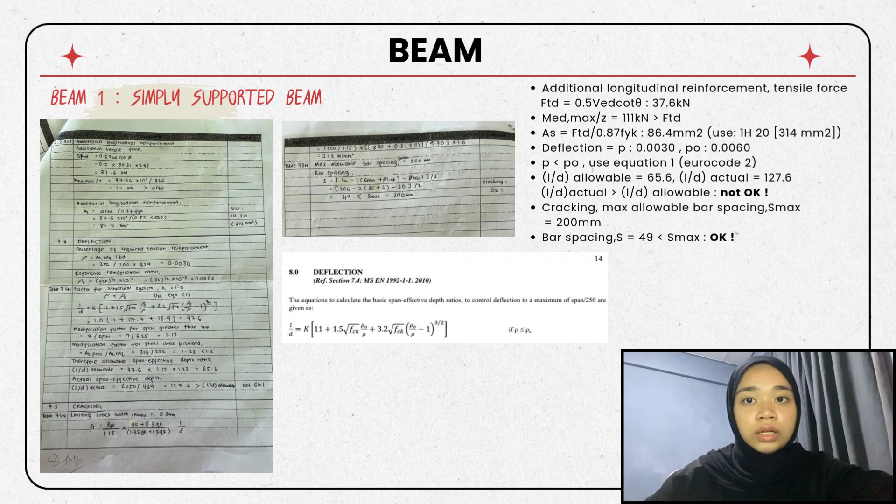My name is Elton Garcelaban Singh, card matrix 07 DKA5C, and now I am going to explain the beam 3 calculation.

So for beam number 3, this document details the initial structural design specifications for a continuous reinforced concrete T-beam, outlining a 4,300 mm span, 225 mm times 500 mm beam width, 110 mm slab thickness, 35 Newton per millimeter square concrete strength, 500 Newton per millimeter square steel strength, and this calculates the critical 1345 mm to 1845 mm effective flange width, and establishes the permanent load GK, which is 5.35 kilonewton per meter square, and the variable load QK is 3.00 kilonewton per meter square.

So for this part, the load calculation converts the total slab load into a line load that the beam has to carry, where the total permanent load is 6.38 kilonewton per meter. The total variable load is 9.00 kilonewton per meter. These are factored up to get the ultimate design load, which is used for safety checks. This load creates a maximum bending moment in the middle of the span AB to CD equal to 154 kilonewton meter.

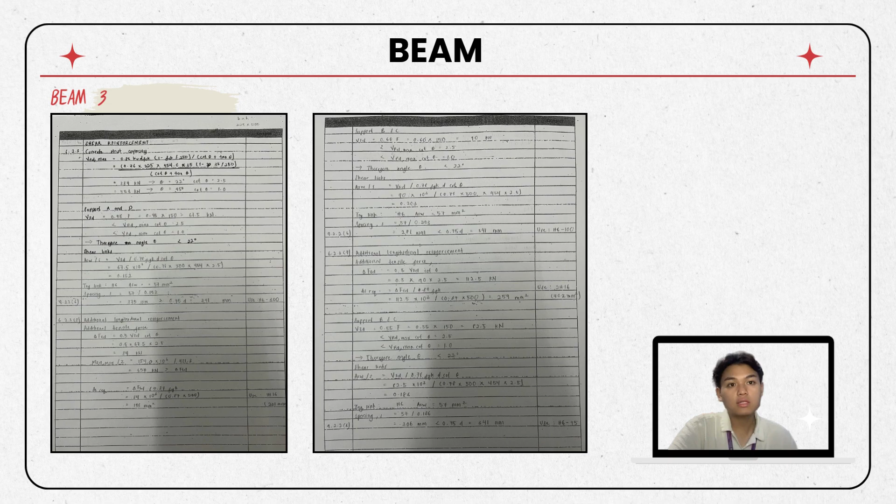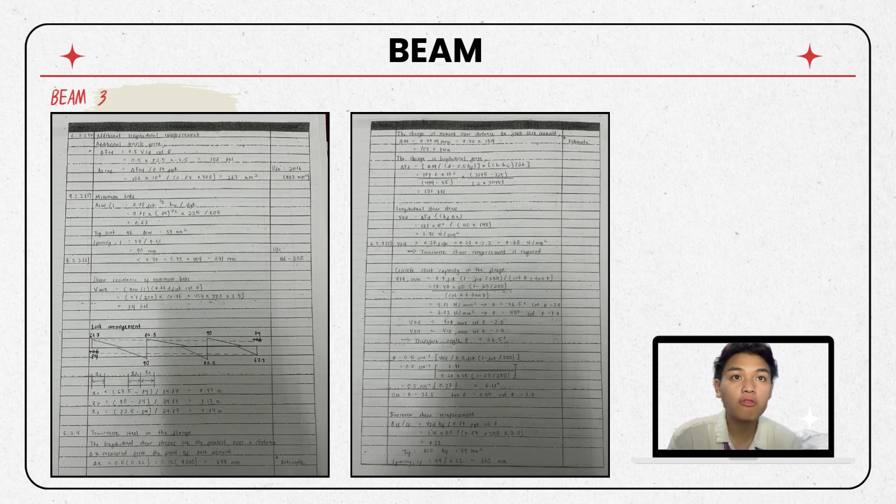So for this part, in summary, the beam needs minimum links where the shear is low, extra main steel to resist shear effects, and H10 at 260 mm links running across the slab to prevent the slab from shearing off the top of the beam.

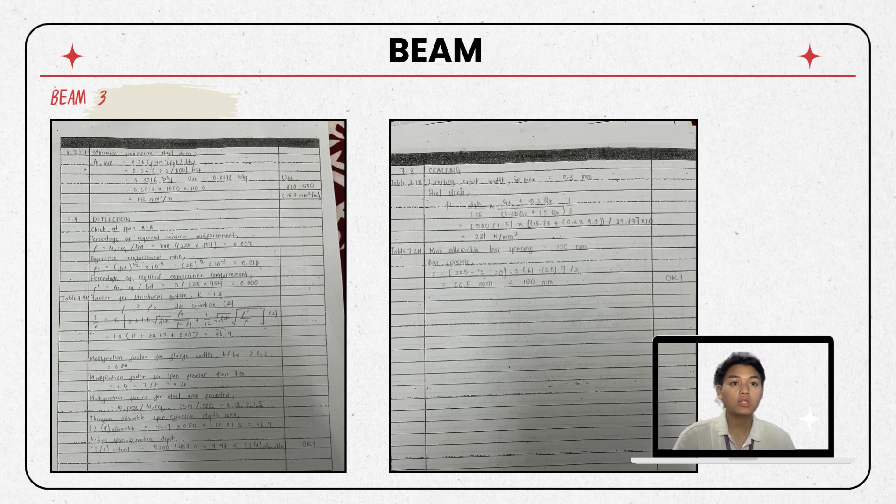So as you can see here, for the cracking control, the actual calculated bar spacing 66.5 mm is less than the maximum allowable spacing 100 mm. So the design is okay for cracking. For the deflection check, this ensures the beam isn't too shallow by comparing the actual span to depth ratio to the maximum allowable ratio. Since the actual ratio 9.47 is much less than the allowable ratio, which is 46.4, the beam is stiff enough and the design is okay for deflection.

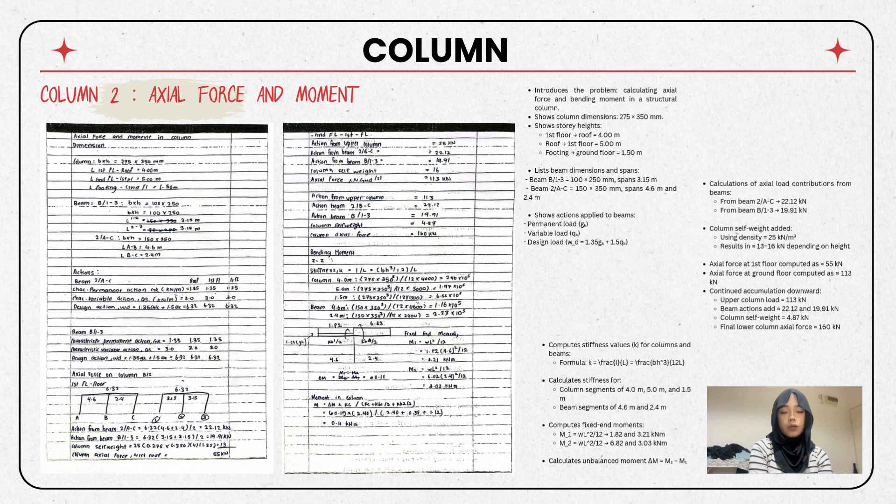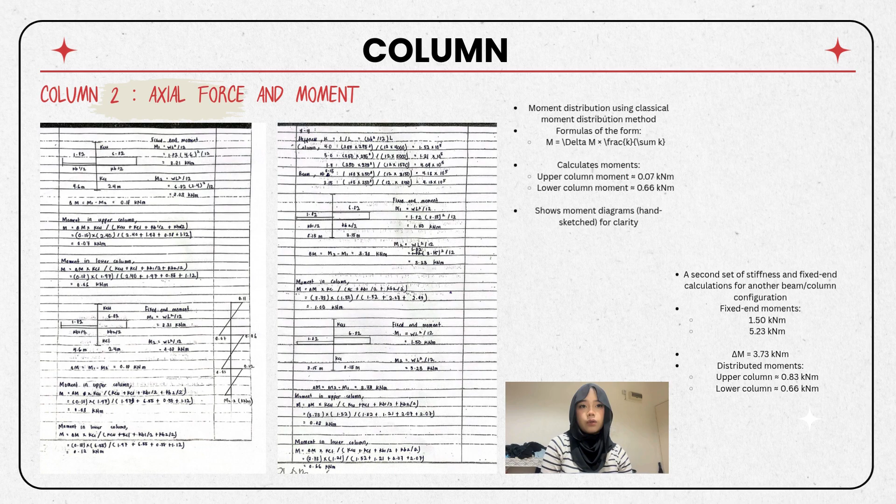We repeat the moment distribution procedure for the second loading case. Again, the fixed end moments are calculated, giving an unbalanced moment of about 3.78 kN meters. Using the stiffness ratios, we distribute this moment between the upper and lower column. The upper column receives around 0.48 kN meters, while the lower column carries about 1.60. These values will later be combined with the previous case if needed.

This final slide summarizes the moment distribution results graphically. The upper and lower columns attract 0.48 and 1.60 kN meters respectively. The diagram on the right captures the complete moment distribution and gives us a clear view of how the bending moment varies through the column. With this, we complete both axial and moment analysis for column 2.